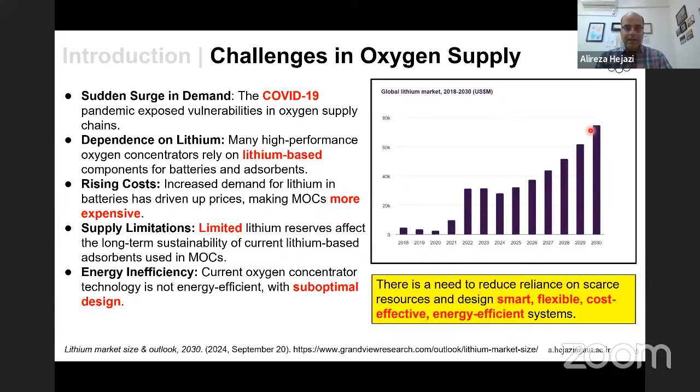Now, let's talk about different types of MOCs that are available on the market now. There are mainly two types of MOCs. One is the stationary oxygen concentrator, known as SOC, and the other type is portable oxygen concentrators, known as POCs.

SOCs are great for home use. They are, especially when high oxygen flow rates are needed, reliable, and offer consistent performance. However, they are not really very portable, so they are best suited for, as the name says, stationary use.

And on the other hand, portable oxygen concentrators, the POCs, are designed for mobility and flexibility. So they are perfect for people who need oxygen on the go, but they have their own limitations, such as low oxygen flow rates and shorter battery life compared to the SOCs.

Now, given the SOCs' larger size and more complex design, they offer more opportunities for improvement compared to tiny POCs, and therefore, for the rest of this presentation, we'll focus on these stationary oxygen concentrators.

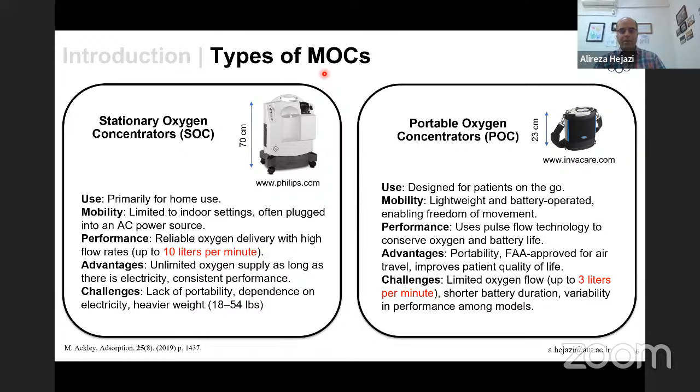Okay, now we are going to use adsorption-based separation for this application to concentrate oxygen. And we all know that it's a process that involves using materials that selectively grab the nitrogen, leaving behind the oxygen-enriched air. The efficiency of this process depends on the right combination of the adsorbent and the process design.

And choosing the right material and process is crucial. So we usually look for materials that have high selectivity, good equilibrium loading, good equilibrium capacity, good working capacity. But from a process perspective, we also consider factors like higher purity, high recovery, low energy consumption, high productivity. The key is to match the material properties to the optimal adsorption cycle.

So how do we achieve this? It's all about detailed process modeling and optimization, and that's the only way that you can achieve this. As we have shown in our collaborative work with Dr. Rajendran from the University of Alberta, each material needs to be married to a process to maximize its potential for any gas separation. And this application is nothing different than the other adsorption processes.

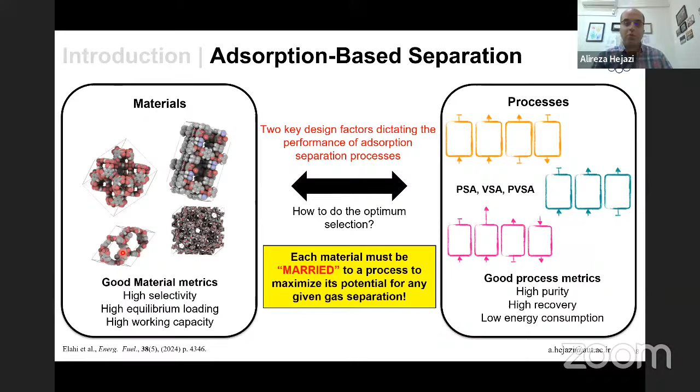So what is our solution? Imagine a patient at home or in a hospital, during a time of high demand for oxygen, relying on oxygen therapy. What kind of device do they need based on what we discussed so far?

To address the challenges we talked about, they would need a device that is smart, adaptable to different patient needs, and of course, cost-effective. And to achieve this, we need to explore alternative adsorbents rather than the gold standards like lithium LSX.

We need to improve energy efficiency, and ultimately develop patient-centric solutions and devices that can adapt to various conditions and needs. Ideally, these devices would be remotely adjusted by healthcare providers. This is the idea behind all the work we're doing, and today I'll present parts of it to show the importance of this work, what we've done, and how we can move towards designing a smart, efficient, flexible medical oxygen concentrator.

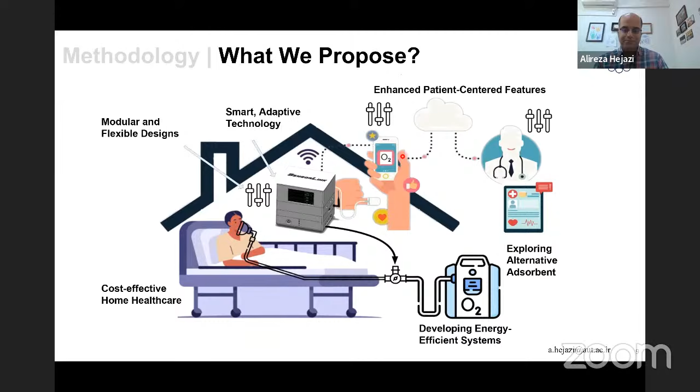To achieve this, we selected six nitrogen-selective adsorbents to test: Lithium LSX, again the gold standard for oxygen purification, Zeolite 13X, Calcium X, Silver ETS10, and Silver Lithium LSX. The last two, the silver exchange materials, can differentiate between argon and oxygen, so they are argon selective. This allows us to achieve oxygen purities over 95%.

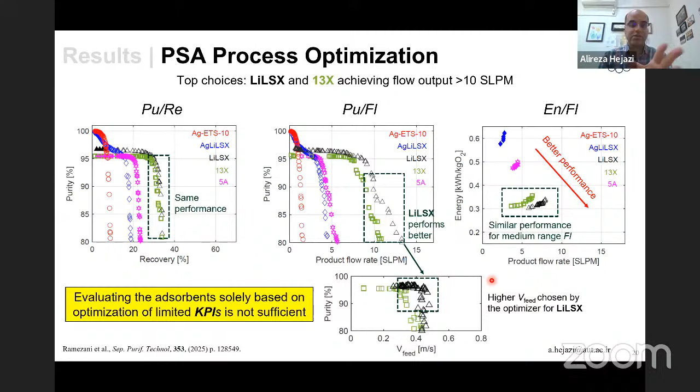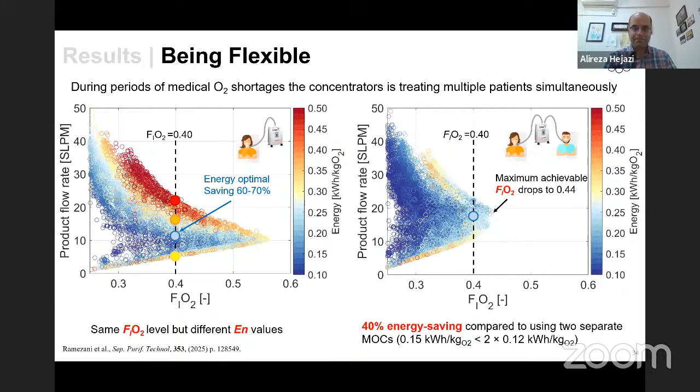Now, while our detailed model provided accurate results, it can be computationally demanding, especially for larger-scale optimization problems.

This would eventually have the potential to revolutionize MOC design, for example by enabling the development of intelligent devices that can adapt to changing operational conditions, eventually leading to smart oxygen delivery and improved patient care. This is the final goal that we are looking for.

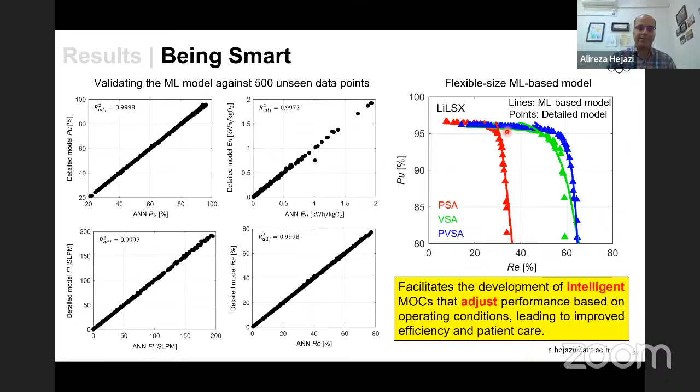Why did we do that? Why did we think about mixed beds? This concept is very similar to the recent work out of Dr. Ronny Pini's group on mixed adsorbent systems for carbon capture. Our approach involves using a weighted average of lithium LSX and 13X in a well-mixed column, then comparing the results with the pure cases.

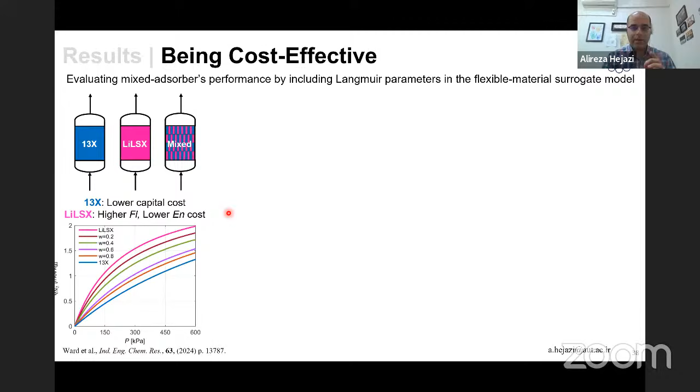We're basically constructing a weighted average isotherm, depending on the weight fraction of, for example, zeolite 13X that you have in the column, and then we optimize the mixed adsorbent system using our flexible material machine learning model quickly, in a matter of minutes. Given that lithium LSX offers higher flow rates and lower energy consumption compared to 13X, but 13X is cheaper on the market.

The price ratio at the moment is around 30, so lithium LSX is 30 times more expensive than 13X. We want to explore the potential of combining them in a mixed adsorbent bed to see how this interplay of operating cost and energy plays against CapEx, the price of the adsorbent itself. This approach will allow us to balance the operational and capital costs while meeting patient needs.

To optimize this mixed adsorbent system, we conducted a series of cost FiO2 optimizations. The cost is made up from OPEX, adsorbent cost, and power cost. We also incorporated 2 additional key variables: the electricity price in dollars per kilowatt hour, and the price ratio of lithium LSX to 13X, since it fluctuates a lot. The price ratio has fluctuated significantly over the past 2 to 3 years due to the recent lithium shortages around the globe.

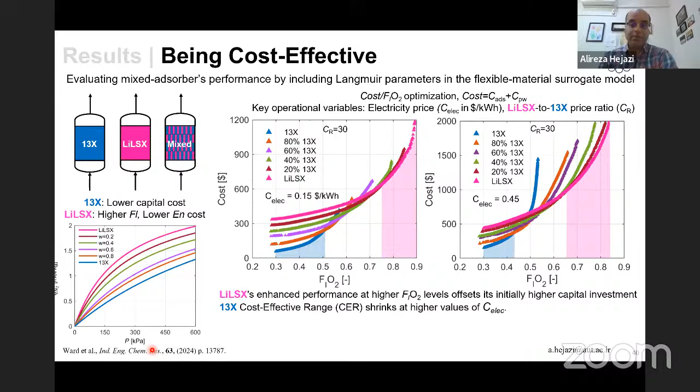Since we are here, I have a personal question regarding the mixed bed. Do you have any guard bed before separating, due to the fact that zeolite 13X performance might be affected by water? In all our optimizations, we assumed a dry feed, which is what's actually happening in reality. You usually have a protective layer of activated alumina or silica gel to protect the molecular sieve from the humidity in the ambient air. But in our simulations, we have considered dry air as the feed.

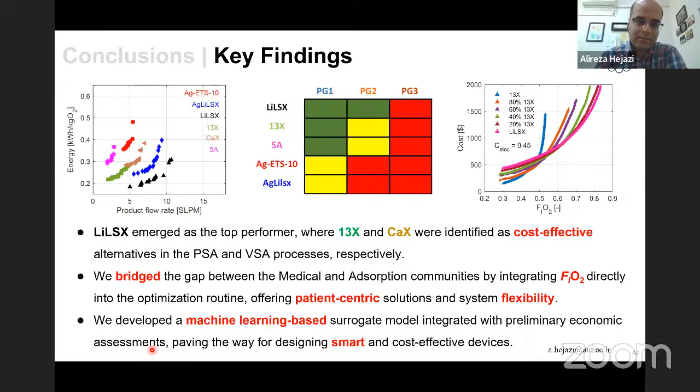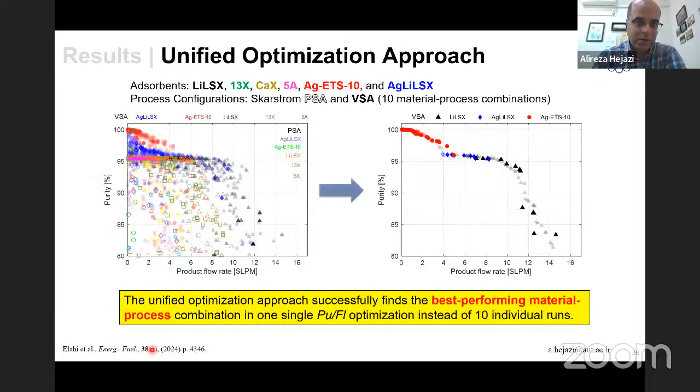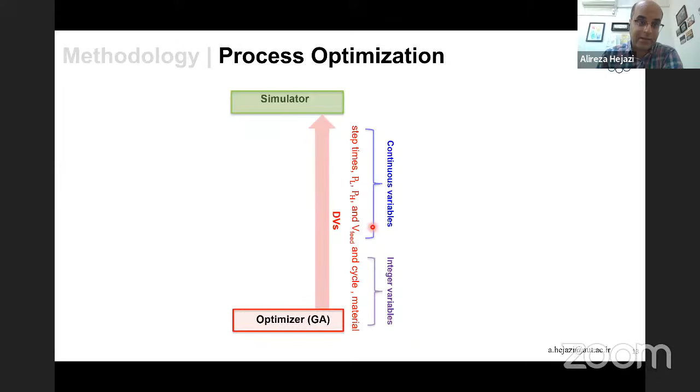He asks, can you tell me what is limiting the flow rate for 13X beds? If it's the pressure drop, what would you expect the results to be if the pressure drop is reduced by 50%? I think the audience is asking about what we see here. So why is 13X lagging behind? This comes from the isotherm, from the thermodynamics. If you look at the isotherm for 13X compared to lithium LSX shown here, you see that 13X has a much lower nitrogen capacity, which results in lower flow rates compared to lithium LSX. Pressure drop in these systems isn't huge, although one needs to take care of it because you usually use tiny particles, around 500 micron particles, to increase the productivity of the system. But usually we don't have any trouble with regards to pressure drop in medical oxygen concentrators.

Thank you so much. I have another question. Of course. While there is no really hard specification on recovery, is there any desired value that makes a material or process combination favorable compared to another one? Sorry, can you repeat your question, Giuseppe? I didn't quite get that.

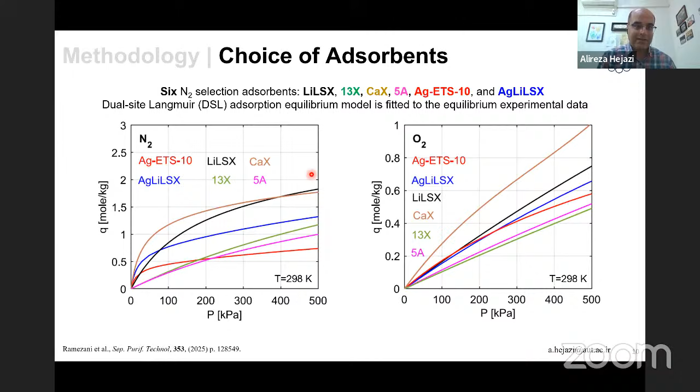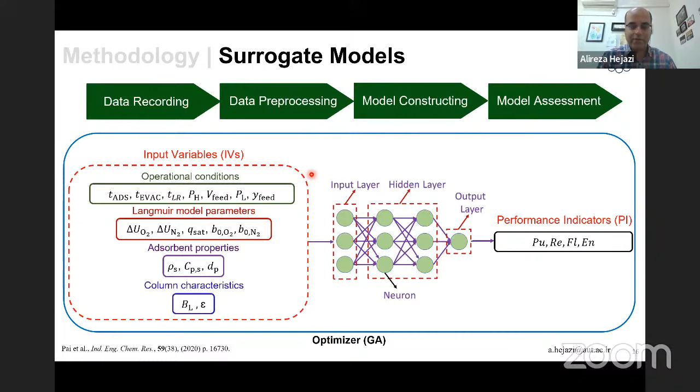It looks like there is no hard specification on the recovery, like for example for CO2 capture. So I'm wondering if based on that, there is any desired value that makes the process or material more favorable than another one. The reason you don't have constraints on recovery like CO2 capture is because your feed is basically free, it's ambient air. So you don't really care a lot about losing what you're introducing, but it is important when looking into delivering high flow rates to the patients, as we saw here. I'm not sure if I answered your question, Giuseppe. You definitely did, thank you so much.